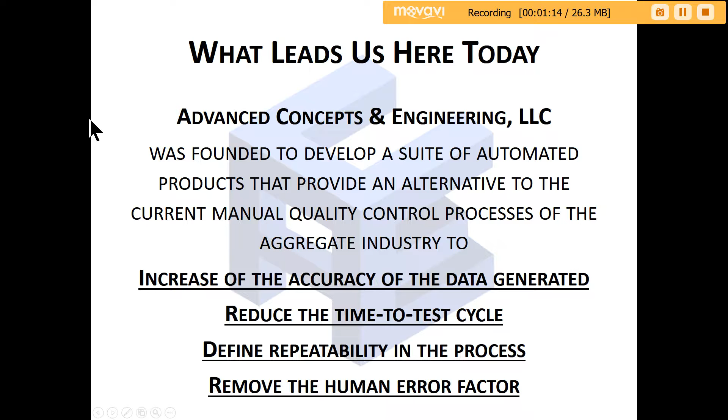We're here to discuss the footing upon which Advanced Concepts and Engineering is built. We are a company that has risen to the challenge to solve the lack of automation in the aggregate industry and the quality control testing segment of the industry at large. The industry continues to suffer from problems with time to test, repeatability, and human error. We need to increase that data, reduce the time to test cycle, and define the repeatability in the process, removing human error.

It's interesting to talk about where through 2017 we're looking to do about 53.2 gigatons this year. That's an increase, an uptick from about 4.6% growth to about 5.8%. Likely with the incoming administration, that number will probably go even further than 53.2 gigatons. Beyond that, it looks like the industry is looking to jump to 66.2 by 2020.

As the industry grows, as the demand continues, the quality control level standards are going to be sharpened as well - virgin aggregates, recycled, hot mix, concrete, ready mix, and so forth.

It's interesting to say that if one's to sit and review the available data, it's mind-blowing to see that in the U.S. there's an absolute positive minimum of 15 million quality control suites on an annual basis. Looking at that number globally, it jumps dramatically to about 283.5 million. That's a number of 44 billion US dollars spent strictly in quality control on an annual basis.

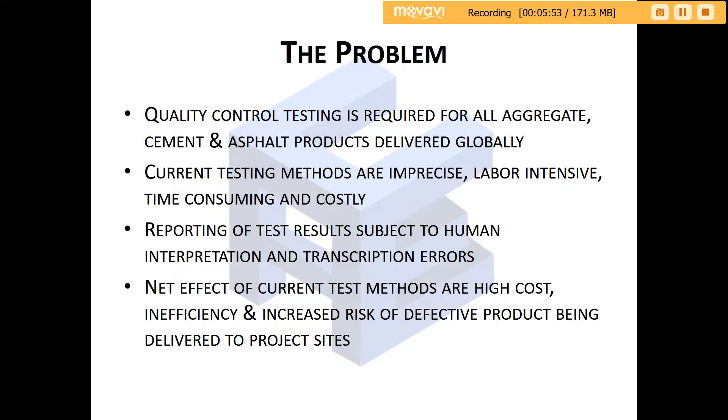So Advanced Concepts and Engineering has developed the solution to the problem, being the ACE AutoGrade Laboratory. This is a fully portable, fully automated, fully self-contained gradation laboratory. This will work with your aggregate, cement, asphalt, ready mix, and so forth. The unit is employed with a touchscreen controlled voice response, and we dry by vacuum - I'll get into that a little later on.

The unit is 100% repeatable. Let's talk about that for a second. What's a certified test? A certified test, by definition, is if John, Bob, and Jill are all conducting the test according to the specification as written - that's a certified test. Well, if John, Bob, and Jill are conducting the same test, what are the chances that the three of them are doing the same test exactly the same way every single time they run it? The chances of that are not very good.

So then what we talked about earlier with the transcription probabilities, one of the things the ACE AutoGrade does is it automatically emails your test data and stores it, uploads it to whoever wants it, including the ACE Advantage.

There's two words in front of us now that we could talk about briefly: integration and automation. The dictionary definition of integration is, quote, the bringing together or incorporation of parts into a whole, or to make up a combination or act or otherwise producing a whole or larger unit.

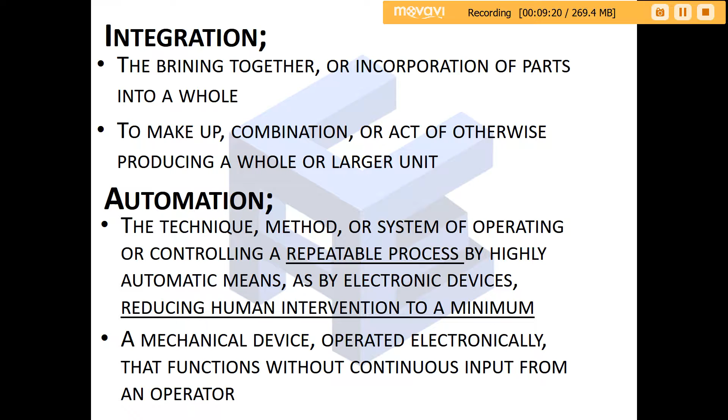The simple fact of the matter here is that systemic integration and automation are no longer optional. We need to update the process in the quality control sector to a level that exceeds the advancements awarded on the laydown side of the house.

Now, I'm honored to say that I know some people on the executive level at Aztec Industries, and I was talking with them about plant production rates. You recall earlier we said that we're looking at 66 gigaton by 2020. Well, our partners on the production side, making the mix or concrete or ready mix, so on and so forth, they've already adjusted their plants to meet those demands.

The problem is those of us in the quality control side of the house, we're still lagging. We're the risk factor. Well, the ACE AutoGrade and the other products designed and put out by Advanced Concepts and Engineering solve that problem. We solve that problem specifically through what we call the Total Integration, Total Automation Protocol.

This is an interesting process, an interesting guideline, if you will, where we've tried to marry a number of events, for lack of a better term, and happenings, in the way that we design our equipment and the way that the equipment functions.

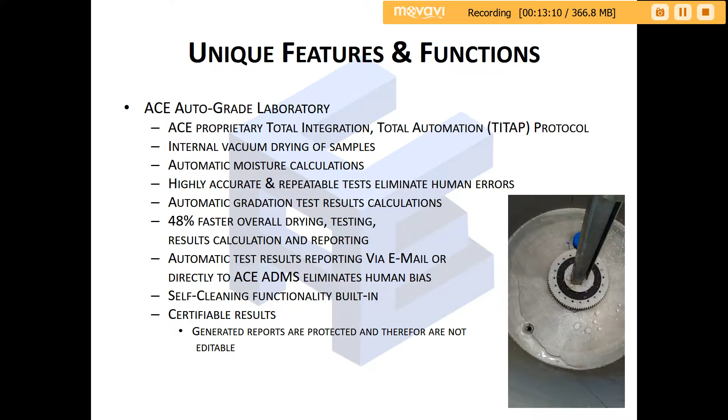Further on is the fact that every time the system is done, it runs through a self-cleaning process, and so forth. To make all of those things happen, we deal with an amazing array of information on the inside. The ACE Auto Grade is comprised of a proprietary blend of equipment that you see in front of you. Everything in your gradation lab is contained within this unit.

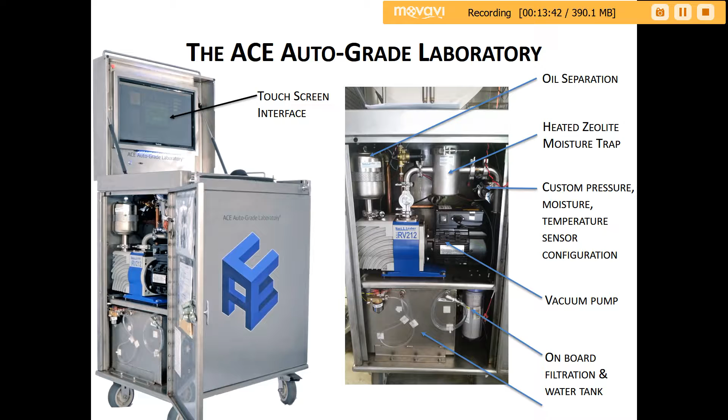You've got your zeolite, you've got your pressure, temperature, moisture, vacuum pump, your water system and filtration is on board. Further on board, we have a fabulous scale system.

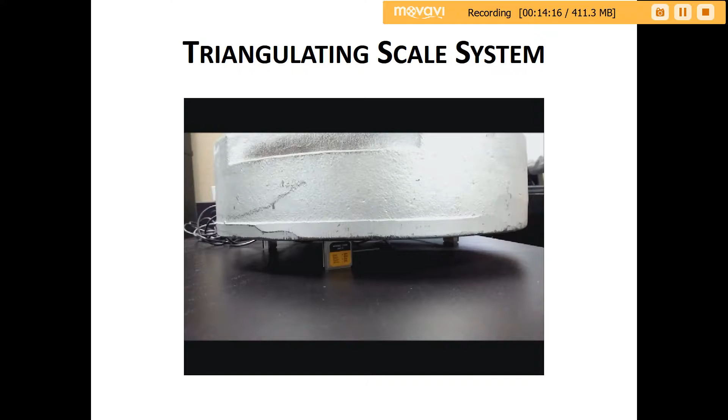This is a little video that I like to share with people to give you an idea of the diligence and engineering excellence that has gone into this machine. We have three OSB 225-pound sensors with a 50-pound weight on top. What I'm going to show is when I put a 0.1 gram weight on it, this will take the reading of that weight. Currently it's reading 0 grams because I just zeroed it. You just put this tiny little thing onto this, and voila, 0.1 grams.

So now you can see the level of excellence that we put into this thing. Typically the unit's capacity is dictated by the number of sieves and size of the material that we're using.

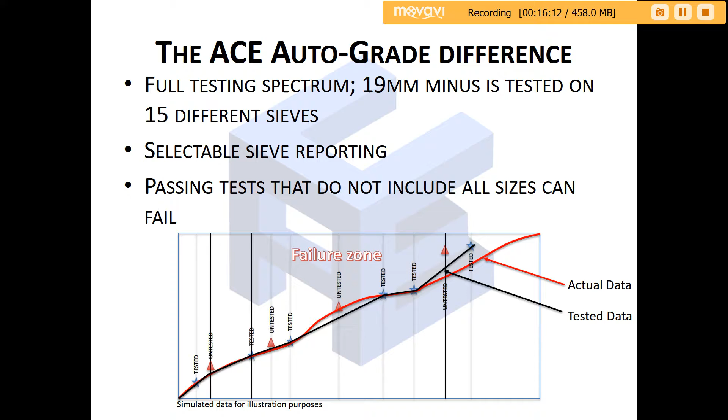As we go on in the process, one of the things we tried to make important is to protect the sample. As I've said several times, we dry by vacuum. In science we know a basic theory: heat destroys and cold preserves. Drying by vacuum lowers the temperature of the sample being tested. Another sub-challenge that Advanced Concepts and Engineering has taken on is the challenge to protect the sample or remove sample degradation. By drying by vacuum, that process has been studied many times.

For example, Mr. Pokel did a study at the University of Oklahoma for Dr. Cross, where he studied a piece of equipment found in some laboratories that dries by vacuum. His summary statement is: the specimen remains at room temperature, which helps to retain the characteristics that can be altered due to prolonged exposure to heat in ovens.

The simple fact of the matter is there's a fact that people in this industry seem to negate, reject, or completely skip over, and that's microscopic thermomechanical failure. By generating heat in an aggregate, you're creating thermal failure, be it catastrophic or microscopic. There's a thermomechanical failure element that's not being discussed, analyzed, or protected against in the industry. By drying by vacuum, we eliminate that possibility entirely.

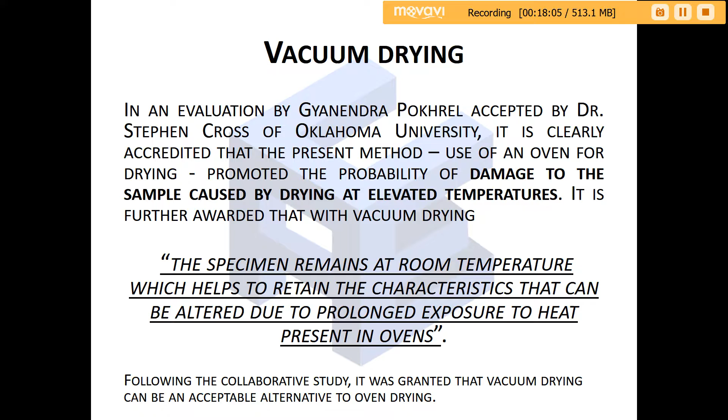ASTM and AASHTO both have acknowledged vacuum drying. Speaking specifically of ASTM, citing 6752, 6752 M11, and 7227, they clearly indicate that vacuum drying is permitted for drying loose aggregates, mixtures, samples, cement, ready mix, etc.

One of the things that's important to notice about using the ACE Auto Grade is you never handle a live sample.

You never handle a live sample. Your sample is not weighed until you load it in the machine, so your sample is protected in terms of its quantity data. Looking at a standard process, you go from scale to heat to scale to sieve stack, then break down each individual sieve back to the scale. Doing a 19 millimeter minus test, you're handling the sample a mind-boggling 14 times.

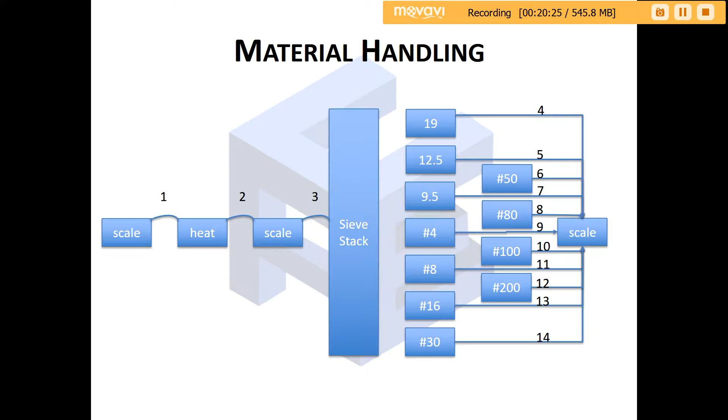That's a risk factor. Let's talk more about risk, speaking specifically in hot mix. If you're looking at the time-to-test issues we discussed earlier, consider a hot mix operation doing 300 ton an hour production, relatively slow. The crusher's running gross production exceeding 2,000 ton an hour. If it takes 3 hours to complete a suite of tests at 300 ton an hour, that's 900 tons of material produced from start to finish of testing. That's a considerable risk.

Now let's go back to the production levels we talked about earlier. Plants today are capable of upwards of 600 or 700 ton an hour. If you're at 600 or 700 ton an hour and it takes 3 hours to run a suite of tests, you're 1,800 to 2,100 tons of material down the line in the hot mix example. That's quite a risk factor.

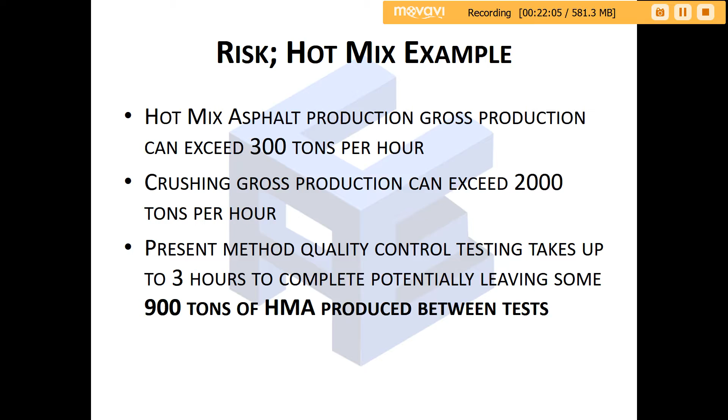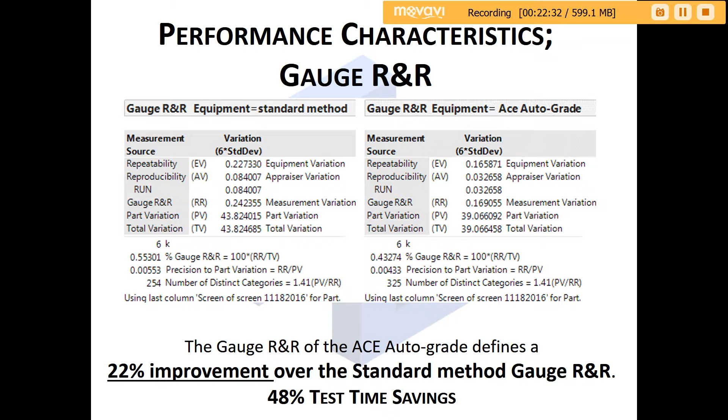The ACE AutoGrade reduces that risk factor by about 48%. So how does it perform? In a standard gauge R&R, the ACE AutoGrade shows a 22% overall improvement against a standard gradation method, on top of the 48% time-test savings. Among other things the ACE AutoGrade is capable of doing above and beyond standard gradation, it has a built-in job mix formula module.

If you're doing a 4-blend mix, and you asked your technician for every possible passing combination, they'd be mind blown. With a blend of four components, there are over 104 million possible combinations. Of those 104 million, about 18,500 mix designs will pass standard quality control points. I'll give you a visual of that in a few minutes.

Some of you have likely asked, is this machine difficult to take care of? Is it hard to use? What do we need to do to maintain it? We wanted to ensure you can focus on your job and the equipment, so we offer a product maintenance plan, an on-site plan where we come to you 4 times a year.

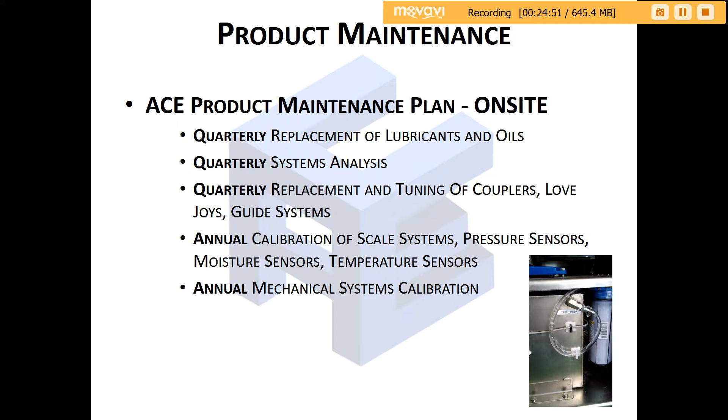With the ACE AutoGrade, it's obvious we've generated a significant amount of data. So what are we doing with it? We upload it automatically to the ACE Advantage data management system. Most of you are using an existing program that requires you to manually key in the data of the test you've just done, but the ACE AutoGrade and ACE Advantage have automated the process for you 100%.

Your machine will automatically conduct your test in a portable format and automatically upload the data for you. So there's no more keying in. Pens, pencils, crayons, we don't use those here.

All of your data is automatically uploaded and fully customizable. It's tracked, recallable, manageable by project, location, client, production facility, date, etc. We can export this in a number of formats. We have automated reporting that we can set up weekly, monthly, even daily and yearly if you wanted.

You have automated email reports on every test that runs. Your administrators will be able to know if there's a test failure or an electromechanical challenge. If there's an electromechanical challenge within the unit, it will send a code automatically to home, what we call home, which is us, to say something's wrong.

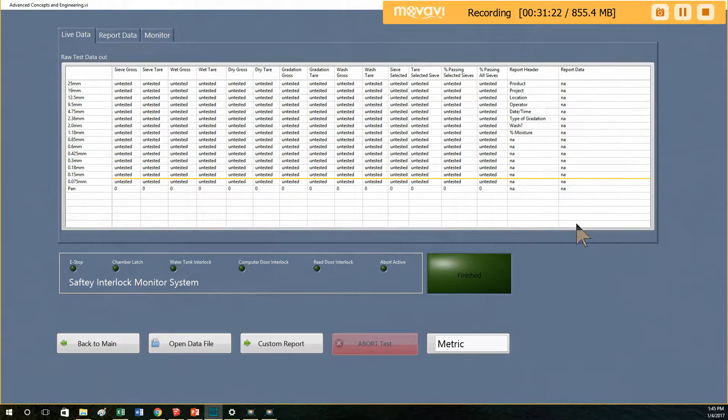Please select the data file to open. And today is January 4th, so let's look for test number 4. You have the live data as it's testing. This is April 13th, 2015.

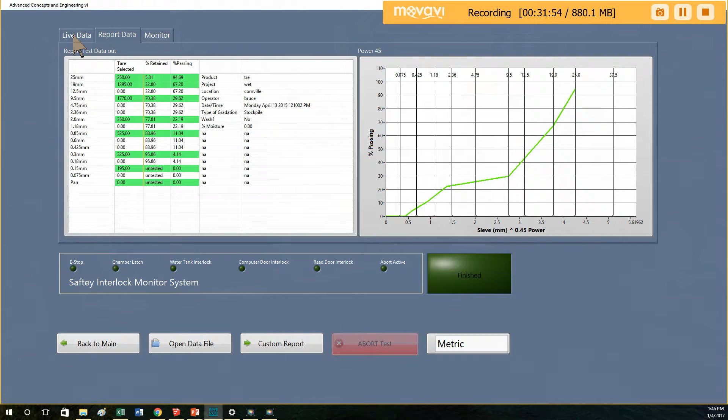You have your report data and you monitor - that's a live data thing. And you monitor, you see the green and the white? I want to explain to you the green and the white, so why is some green and some are white. When I go to configure a test, I'll run the same one that I did in Florida.

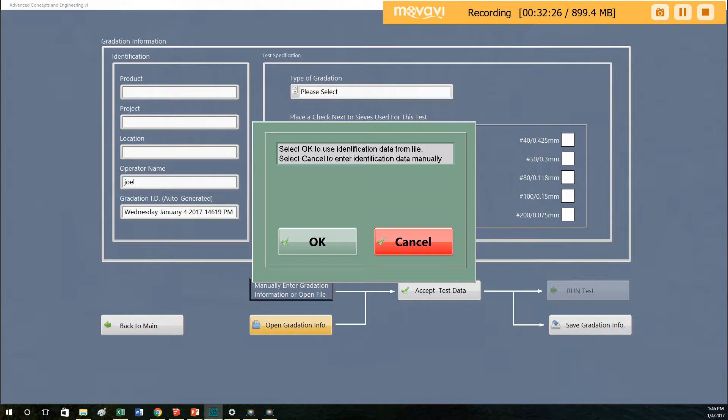As the ASTM demonstration, to use identification data from file: one of the things that's important is if you're running the same test over and over again, if you're paving Interstate 95 or whatnot, and you want to use the same data over and over again, you can select it, and you see OK to use identification. You say OK, and you'll see these populate by themselves.

You see this is set up for a mix gradation post burn. This is in an asphalt format. You see these sieves, some are checked and some are not. The unit's going to test each individual sieve. It'll report on what you select, but it's going to test 15 sieves in this unit.

One of the things I want to show is if you don't set everything up correctly, the unit's designed to make sure you cannot make a mistake. So I don't have a type of gradation selected here. Error: the following information is missing. Gradation type is not selected or sequence file is missing.

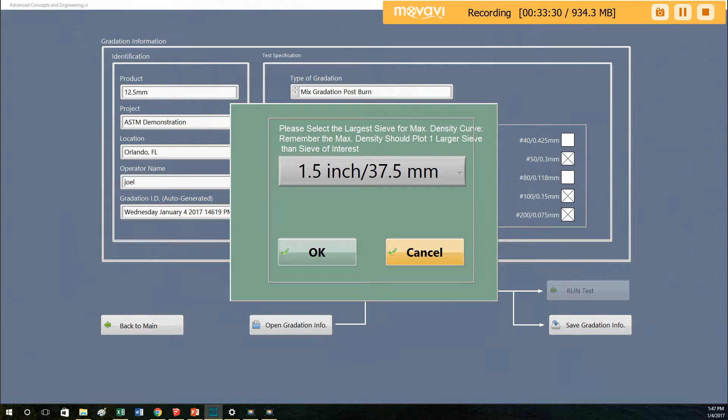So that's just an idea of the redundancy that's built into the machine to let you know that it's done and ready to go, and make sure that everything is proper. So I'm going to accept my test data. Gradation information has been accepted.

And we can go ahead and run the test. You have chosen to activate the mix post-burn testing sequence. If this is correct, click OK. If not, click Cancel.

Automation notice: the unit you are using is employed with intelligent software operating under the Total Integration Total Automation Protocol. When a test is initiated, a series of actions are programmatically initiated. It is for your safety that doors and test chamber remain closed and that the unit only be operated in the manner for which it was designed.

Your continued use of the ACE Auto Grade acknowledges this statement. Safety notice: the engineering department at Advanced Concepts and Engineering has taken considerable effort to ensure your safe operation of the ACE Auto Grade. Under no circumstances should you attempt, at any time, any electromechanical repairs or service on the ACE Auto Grade. If you have a service issue or question, please contact us 24 hours per day.

207-270-3025. Abort notice: should the need arise to abort a test, the unit will complete its present task at hand while the abort button is pushed. When a dialog box is on screen, the abort button within the dialog box takes priority. Should you need to stop the process in an emergent nature, use the EMO button to your left and it will immediately shut down the entire system. All data will be lost for the test being performed.

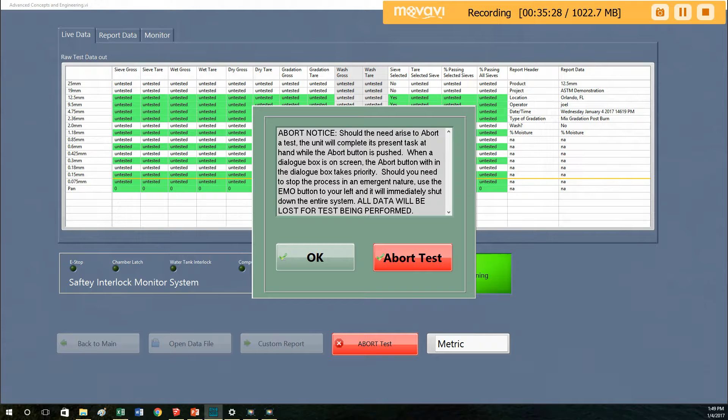The zeolite heater will now be activated. Should you be required to open the door to the left, take care to be certain not to touch the heater. That would be the replacement of the flasks and the zeolite you have on the shelves in your laboratory.

The system will now ensure proper operational capacity and calibrate. What it's doing right now is cycling the pressure, cycling all of the valves open and closed, and turning the pumps on and off to make sure that everything is fully functional and ready to run. It will run a systems check like that every time it runs a test. The system check is positive and operational.

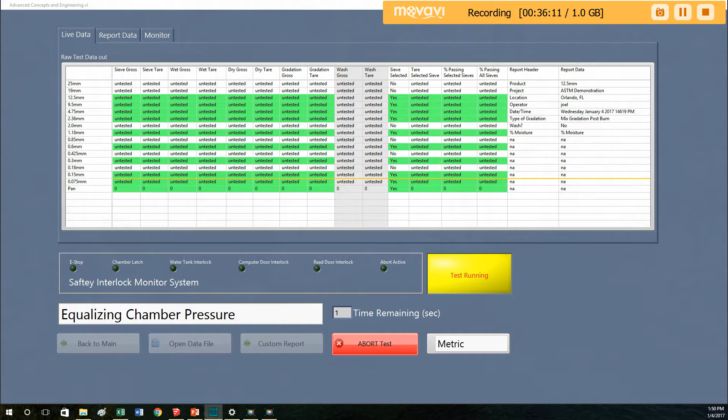As it goes forward through the test, it'll generate all of the data. Open the chamber lid. Make certain there are no obstructions in the chamber. Load the first 8 sieves, smallest to largest. Make certain that the arrows on the sieves are facing the user.

Now the elevator is repositioning to take the next set of sieves. Open the chamber lid. Make certain there are no obstructions in the chamber. Load the next 7 sieves, smallest to largest. Make certain that the arrows on the sieves are facing the user. The system will now record tare weights.

Now what's happened is you put 15 empty sieves in the unit. If you see over here on the far left, the sieve gross column, these numbers are slowly going to start to populate. You'll see a cumulative number here first, and then it'll tare out and get each individual weight of the sieves empty.

I'm not going to run a full length test here because I don't want to. I've already kept you in front of the screen for 37 minutes if you're still with me. But I want you to see how this works.

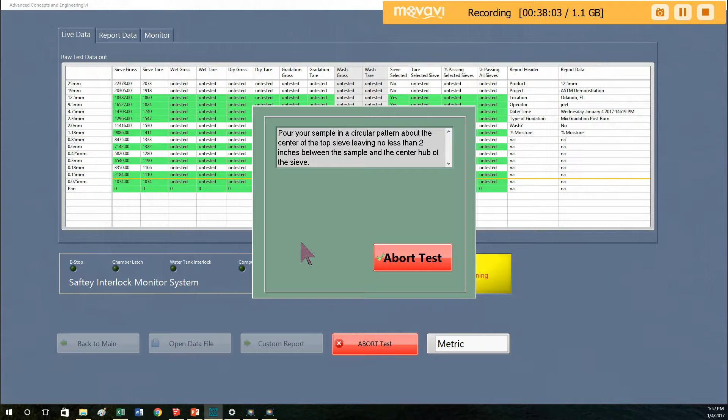Pour your sample in a circular pattern about the center of the top sieve, leaving no less than 2 inches between the sample and the center hub of the sieve. Close and lock the chamber lid. Press OK when ready.

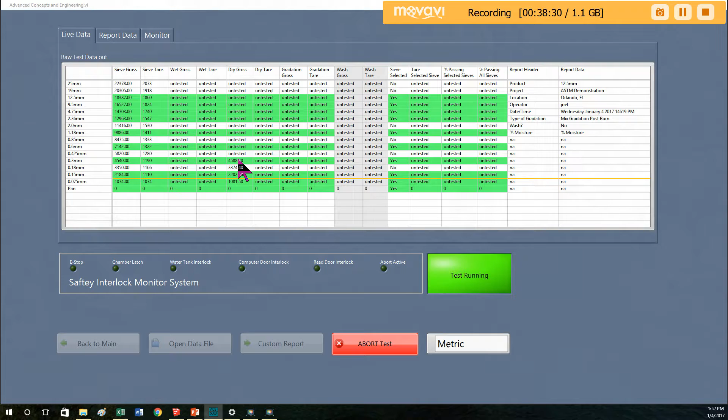The system will now record dry weights. So now it will go through and weigh everything again individually, one at a time. Over here, because this is a post-burn gradation, you'll see these numbers are slightly different. This is showing the weight of the material you put on the sieves. Then what's going to happen is your dry tare—it's going to take your dry gross, deduct from your sieve tare, and give you your material only. But they're not representative of your final gradation.

The individual sieve weights are not representative of your final gradation. The ACE Auto Grade will now perform the gradation on your sample.

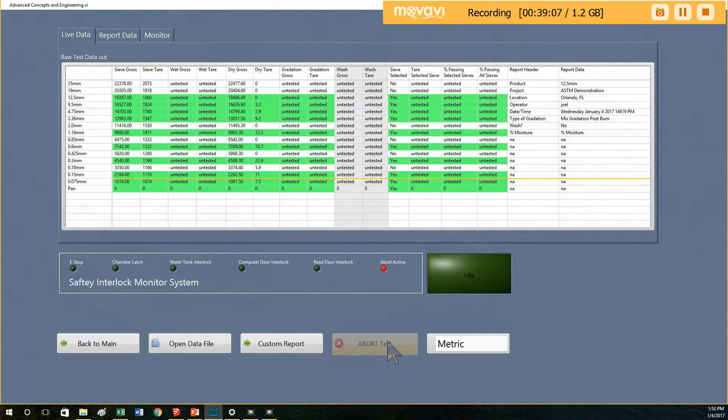Now I want to show, as it's doing this, I want to show an abort. Operator aborted the test. So now what it's done is it's stopped, and what it's doing right now is it rehomes everything. But I want to go through and show you a little bit more function about the machine because I don't want to take up a whole lot of your time here.

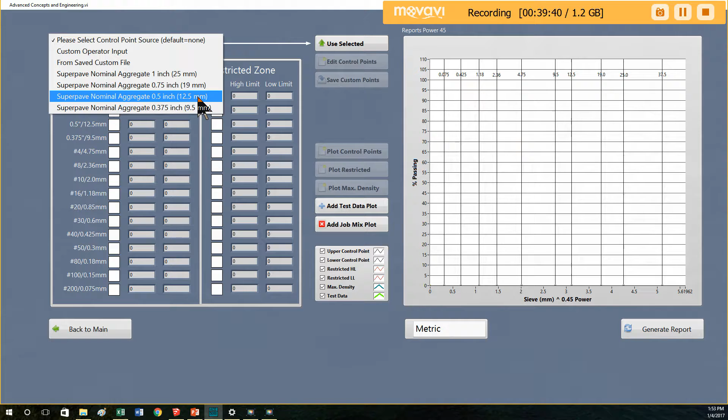Let's do a mix design. Again, we're in an asphalt format, so we're going to do a mix design. And when you see this here, please select control points. You have a couple preloaded control points, and you can edit them all, or you can put in your own. So let's go with a 12.5, and I want to use that one. And you see your control points are populated.

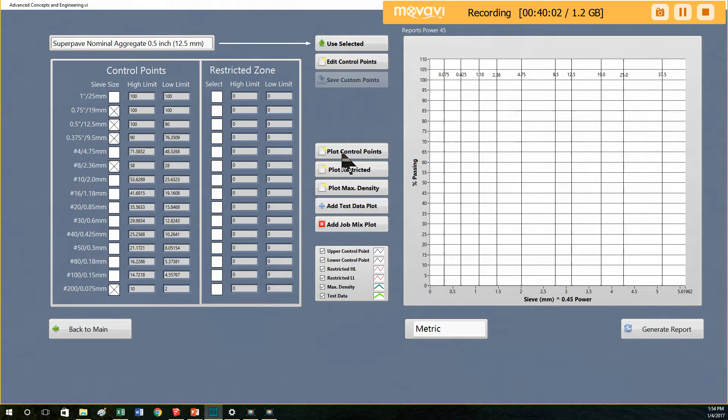Earlier we spoke about y equals mx plus b. You'll see these ones that are not checked, that's your y equals mx plus b, solving that problem. And if you wanted to see your control points, then you do plot your control points. If you want your restricted zone, some people use it, some don't. So there's nothing to plot because there's nothing there.

One of the things I do want to show you is I want to edit this. Let's see, this is on the wrong screen, so it's not going to let me do that. Operator canceled control point edit. It won't let you make a mistake. If you crisscross your control points, it won't let you do that.

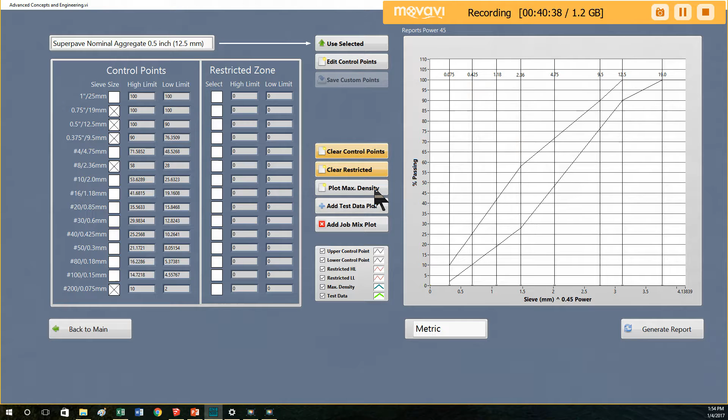You want to plot your maximum density or not. So now we want to make a job mix plot, and you can choose to make a mix design under any format that you like. And I'll bring that screen over here.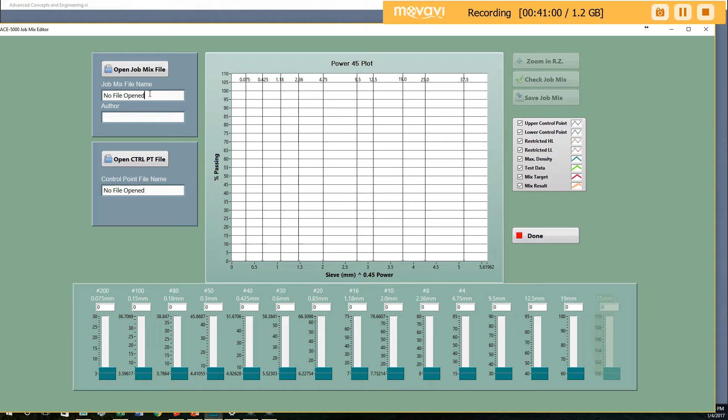And we're going to call this, we're doing a 12.5. Please select the control point type to open, that's a standard. Please select file to open, 12.5. So this is your median target here.

What I want to do is I'm going to purposely do some things here for the authentication purposes of what I'm talking about here. Let's move this, these are just sliders that move up and down. So if you want to design your own mix based upon your median that's generated for you, you can just slide these sliders up and down to wherever you want them, and it won't let you go out of the control points.

So that's the target that we're going to choose. So we're going to check it to make sure that it's okay. Plot values have been accepted. And obviously it's okay. So now we're going to save it, and we're going to call this January 4 video demo.

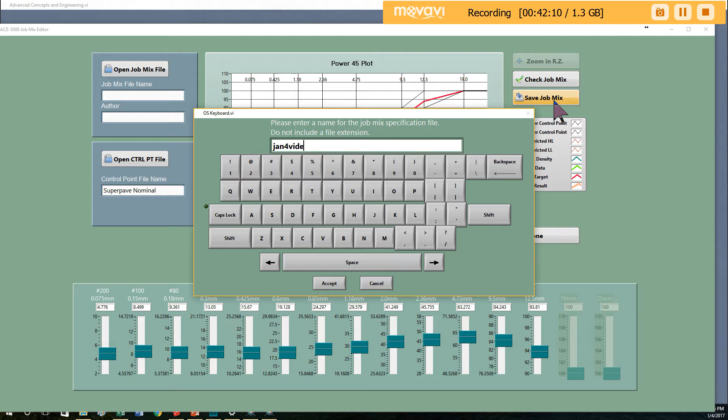And we're done. So now we're going to go to the job mix predictor. And the job mix predictor, if I can get this screen, it's not going to let me put that screen on there. It won't let me move one screen to the next because it wants to all operate on one screen. The job mix predictor will take those four blends and put them together for you.

When you look at the tech mode or the system settings, voice, you can shut the voice off, you can turn it on. System settings, if I wanted to say I want to add a user and we want to call this person user 1, and their password is going to be 123, and they're going to be a guest, and their email is info@advconing.com.

Accept. I want to enable email and give them test reports and error reports. But I want to make sure that their email works, so I want to send them a test email. Test message has been sent. And if I go and I look at my email now, I have an email message from the ACE AutoGrade.